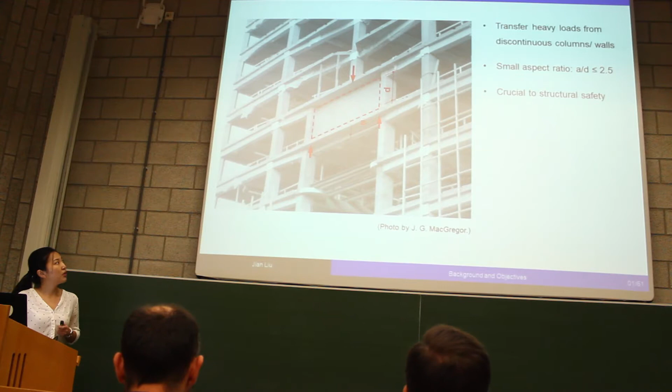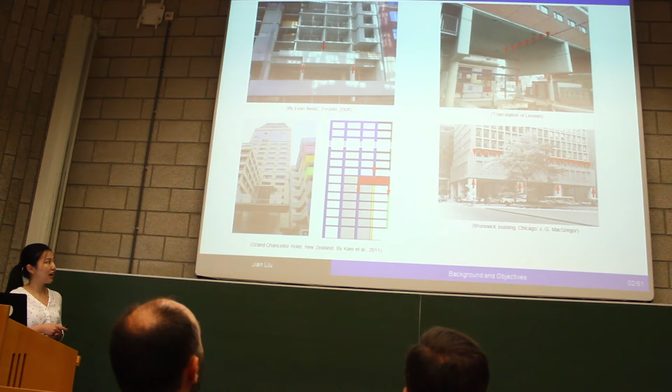But of course, there are some other cases. For example, here is a transfer girder in the train station of Leuven, and here is another building in Chicago, where instead of being concentrated, the load is uniformly distributed along the length. This is a structure in New Zealand, a cantilever deep transfer girder, which has the heavy load on the bottom stories.

In concrete structures, there are many other structural elements that are not called deep transfer girders, but behave in a very similar way. For example, we have cap beams in bridges, thick floor diaphragms in buildings, strip footings, and raft footings in foundations. All those structural elements could actually be adapted using the theory I'm going to develop to solve these problems as well.

As I mentioned, the A over D ratio is a very important parameter for deep beams. How will this parameter affect the loading mechanism of the beam?

Here I will demonstrate the reason through an experiment carried out by Kani. In his experiment, he tested a set of concrete beams with A over D from 7 down to 1, and all the beams tested failed in shear. If we follow the sectional model, based on the hypothesis that plane sections remain plane—a very classical hypothesis—our prediction is much lower than what we have seen in the experiment.

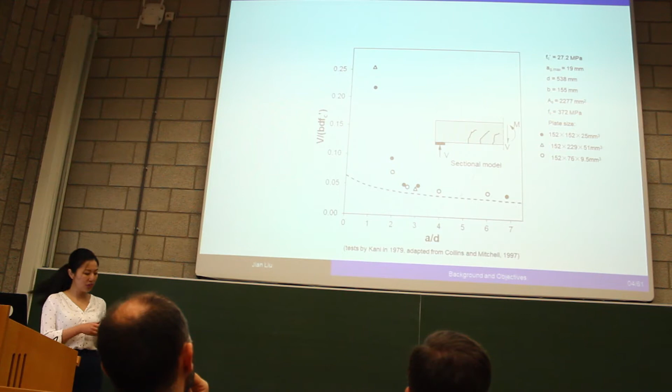Why is that? It's because in deep beams, instead of following the hypothesis that plane sections remain plane, we have a direct compression strut between the loading point and the support. This special loading mechanism makes deep beams much more efficient in resisting shear than slender beams.

And now I want to tell you more about the shear behavior of deep beams.

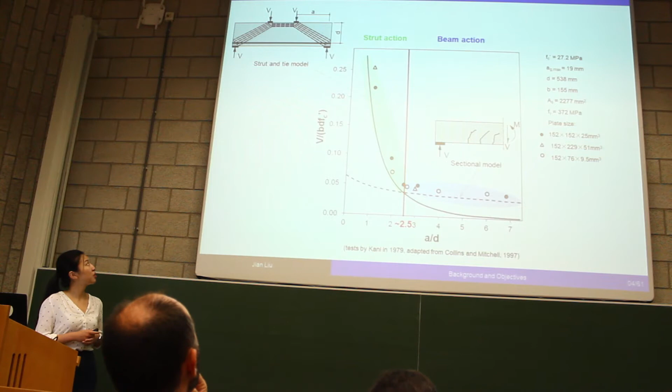I want to show you this experiment done at the University of Toronto. It is a deep transfer girder with a very large depth, 4 meters. At shear failure, we can see an almost straight diagonal crack, and at this small region we have concrete crushing.

Actually, before the test, there was a competition organized to predict the shear strength of this deep beam, and there were a lot of participants from all over the world. Here is our result. This vertical dashed line is the experimental result, and the other vertical lines are predictions based on design codes. Those dots represent individual predictions from either industry or university.

We can see very big deviation in all the categories, which means that even though in the past 60 years we have been making a lot of effort to study this problem, it's still a big challenge until nowadays to predict accurately the shear strength of deep transfer girders. But through this diversity, through this deviation, we can also see there are some models that behave relatively better than the others. But this is just a specific beam.

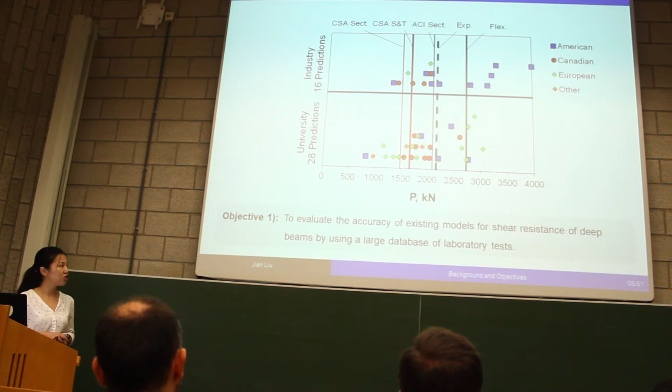Until now, I'm only talking about shear capacity, and as we can see from here, along the complete shear response, shear capacity just corresponds to a specific point. Of course this is the most important point, but through this point we cannot see enough about our structure.

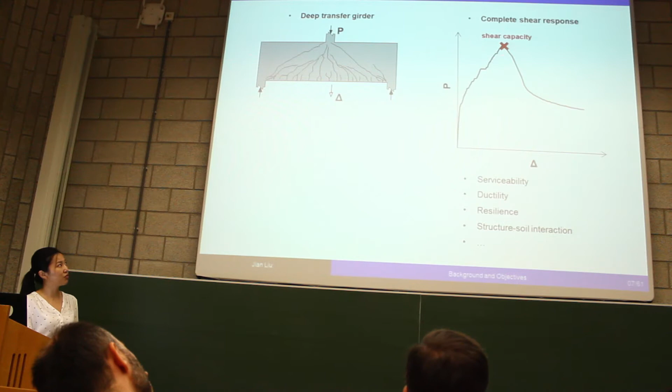For example, if we want to estimate serviceability at the service load, we need to look at the pre-peak behavior. If we want to estimate ductility, if our structure is under some accidental load, then we need to look at the post-peak behavior. Therefore, it's not enough to just focus on this single point.

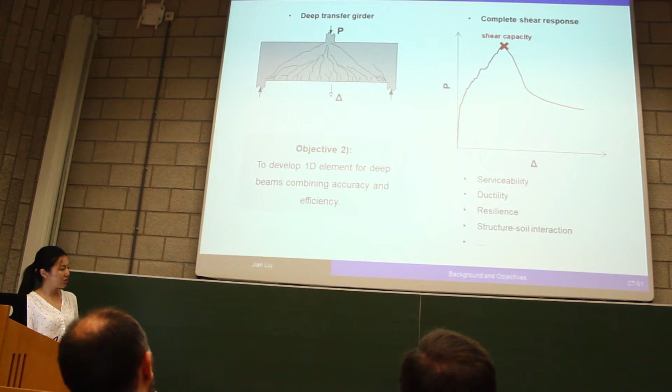Therefore, my second objective is to develop a 1D element for deep beams, combining accuracy and efficiency. For accuracy, I want my model to be able to provide this kind of complete shear response very accurately, and at the same time I want it to be efficient.

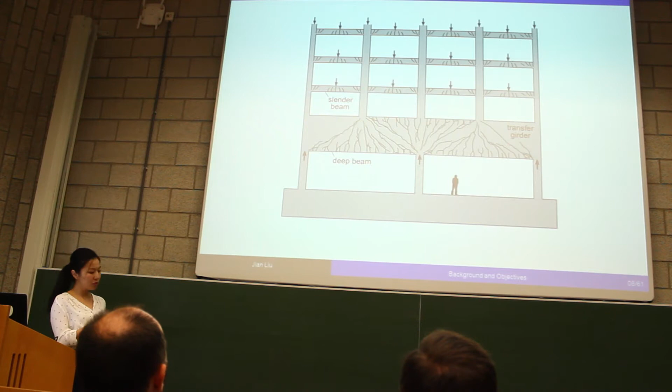But there's a fundamental problem: the theory background for deep transfer girders is wrong. It behaves totally different from a slender beam. Therefore, we can look at the other option: we can use 2D finite elements to model the entire frame. Now we can get more accurate results, but at the same time it is very time-consuming, or sometimes it's just impossible for us to build the model or run the analysis.

So this leads to my third objective. I want to use the 1D element I'm going to develop for deep beams together with the normal slender beams to form a 1D model for this entire structure. Therefore, my third objective is to integrate the new model into a framework of frame structures with both slender and deep elements.

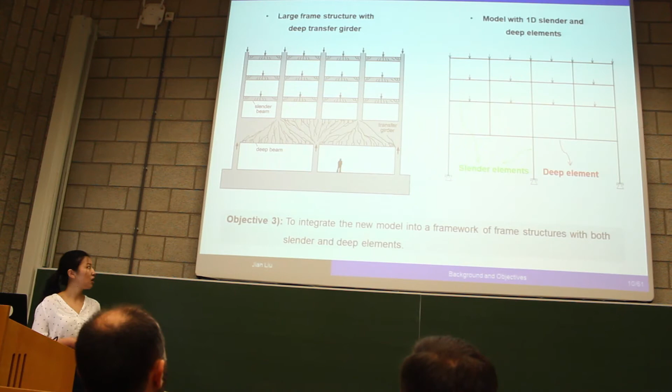So with these three objectives focused on solid deep beams, I have neglected a very important case, and this case is actually neglected by most researchers. We have such a large beam, normally this girder has a depth of 3 to 6 meters. With such a big volume of concrete, sometimes we just cannot avoid accommodating windows, doors, or pipelines.

Therefore, there must be some web openings installed in the transfer girder in a lot of cases. And if this web opening is interrupting the loading path, how will the transfer girder behave? So my last objective is to propose a model to predict the shear capacity of reinforced concrete deep girders with web openings.

In the following 45 minutes, I will try to achieve these four objectives one by one. My first objective is to carry out a comparative study on existing models, and then I can find out which

models are more adequate to predict the shear capacity of deep beams. To realize this objective, first I'm going to do a literature review, and I have looked at 73 papers published in the recent 30 years.

I have classified these 73 models into 6 categories. The majority of the research is focused on strut-and-tie models, and then I have a lot of artificial intelligence models and numerical models. And then I have 8% upper bound plasticity model, 5% shear panel models, and the smallest portion goes to other mechanical models.

I have to mention that in the following comparison, these two are not included. The reason is that numerical models are not developed especially for deep beams, and artificial intelligence models are based on mathematics rather than physics. Therefore, I only look at models belonging to these 4 categories based on physics.

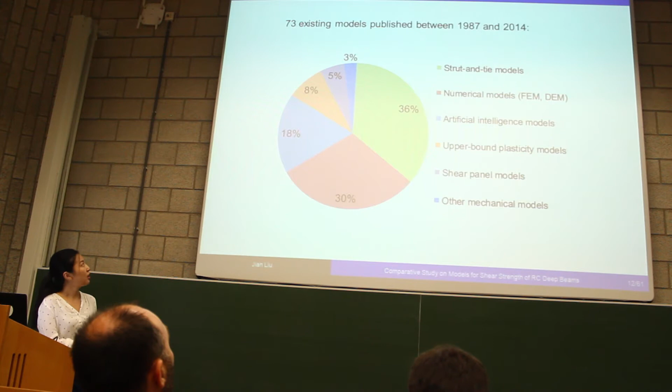In order to carry out this comparative study, I follow 3 steps. First, I collect a large database of tested deep beams, and then I implement 10 representative models into this large database. Finally, I could compare the predicted and experimental shear strength for each of these 10 models.

Here is a large database of 570 reinforced concrete deep beams. This database was collected by my supervisor, and I just did a little bit of extension. Here I show you the 10 models selected for the implementation. We have one shear panel model, one upper bound plasticity model, and we have 6 strut-and-tie models, and the last 2 go to mechanical models.

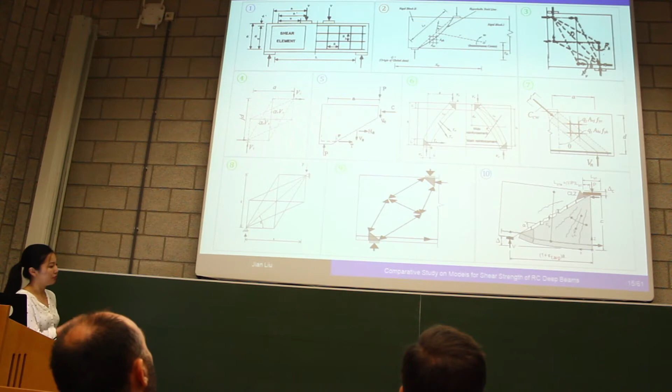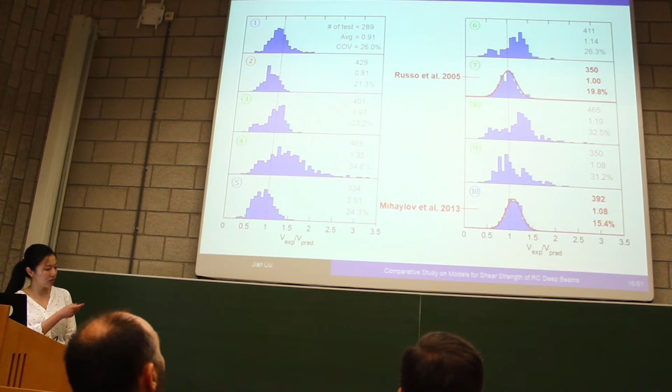Due to the good performance of these 2 models, it is interesting for us to have a closer look at them. So first, I look at the model by Professor Russo.

We have a strut and tie model. Here we have a concrete strut with compression in it. And due to the existence of web reinforcement, we have a statically indeterminate shear system. The shear strength of this shear span is assumed to be contributed by concrete and web reinforcement.

The full expression is like this. There are a lot of coefficients in this equation, and most of them are actually derived by fitting with more than 200 experiments rather than physics.

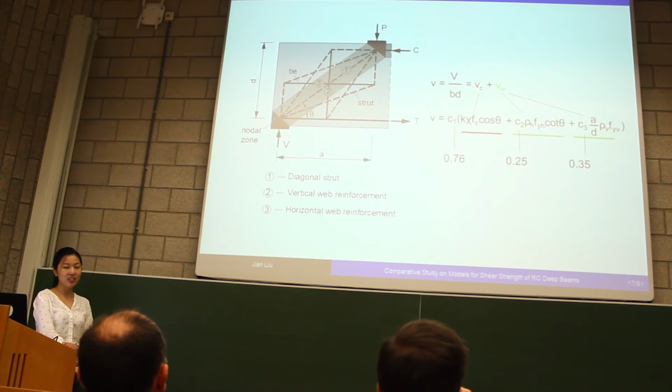The other model is called the 2-parameter kinematic theory, which is developed by Professor Mihaylov in 2013, based on experimental observation. Here, in this model, we assume there is a diagonal crack running from the support up to the loading plate, and this straight crack separates the shear span into 2 parts. We have the bottom part behaving like a fan.

It opens according to this point, along with the elongation of the bottom reinforcement, which can be represented by the tensile strain epsilon T average. At the same time, we have this top part, which is assumed to be rigid, except that we have this

small region, which is called the critical loading zone. Inside, there's a very high concentration of compression. Therefore, we have vertical displacement delta C in this region, and with this delta C, these two blocks separate from each other vertically. With these two parameters, we can actually express the entire displacement field of this shear span, which turns out to be a very important tool. I will talk more about it later.

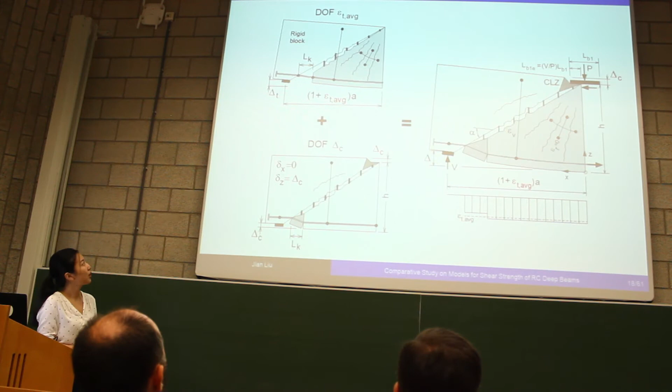Now we can look at the shear mechanism. Along the diagonal crack, we have four shear mechanisms. We have the shear contribution from the critical loading zone due to the high compression. We have shear contribution from aggregate interlock due to the opening and slip of cracks. Then we have the contribution from stirrups, and we have the dowel action in the longitudinal reinforcement.

If we look at the vertical equilibrium of this free body, we have the shear force equal to the sum of these four shear mechanisms. And if we look at the moment equilibrium, we can easily relate the shear force to the tensile force in the bottom rebar. How do we solve this system?

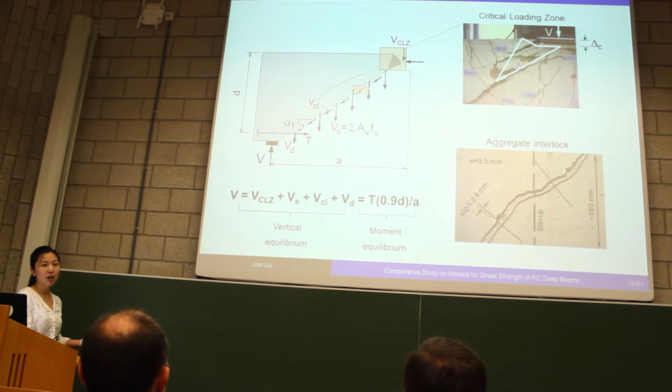So by now, we already know enough about these two models. We can go back to the comparison. We already know that these two models behave very well statistically, but are they physically reasonable? To answer this question, I did a parametric study. I looked at some important parameters, for example, A/D ratio, the stirrup ratio, the longitudinal reinforcement ratio, and for all those parameters, the two models capture very well the trend in experiment.

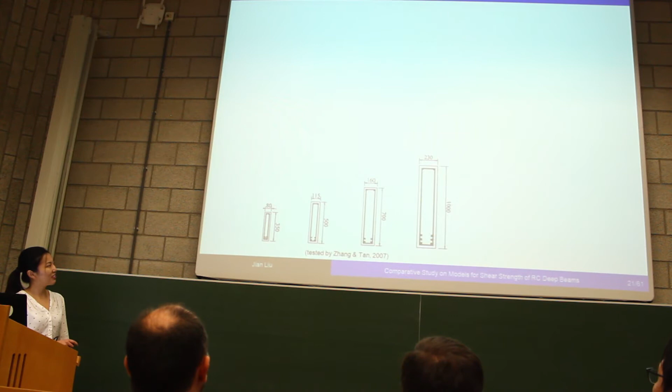But there's one very important effect I want to talk about explicitly. It's called size effect, and I will demonstrate this effect with the help of an experiment done by Zhang and Tan in 2007. In his experiment, all the beams are symmetrical, very similar in terms of geometry. The main difference is the dimension of the beam.

Here is the result. On the horizontal axis, we have the effective depth. On the vertical axis, we have the nominal shear strength. We can see when the beam depth increases from 350 millimeters to 1 meter, there's a clear decreasing trend in both beams without stirrups and with stirrups. The shear strength decreases around 15% for both groups of beams.

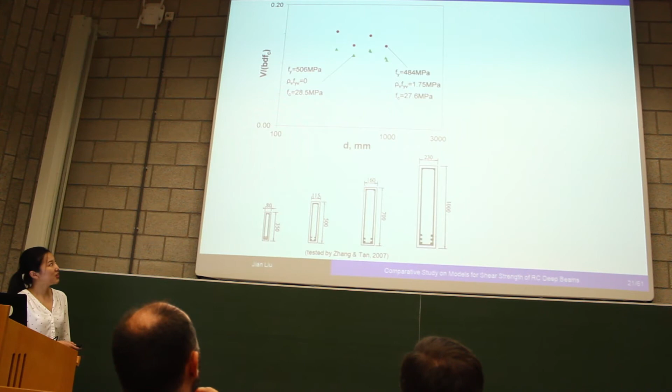It seems not a very big difference, not a very amazing difference, but the problem is that in practice we have very large structures. For example, here I show you, it's around 3 to 6 meters. So if we follow this trend, the shear capacity can reduce by 30 to 40%. This is huge. We must take this effect into account in our model.

So how are these two models behaving in terms of size effect? Here is the result. Obviously, the strut-and-tie model totally neglects this effect, and the effect is very well followed by the 2PKT model. Therefore, my conclusion for this comparative study is that 2PKT provides adequate predictions. Among the 73 models I have reviewed, most of them, almost all of them, are only focused on shear capacity. Only 2PKT is not only focused on shear capacity, but it can also predict the deformation.

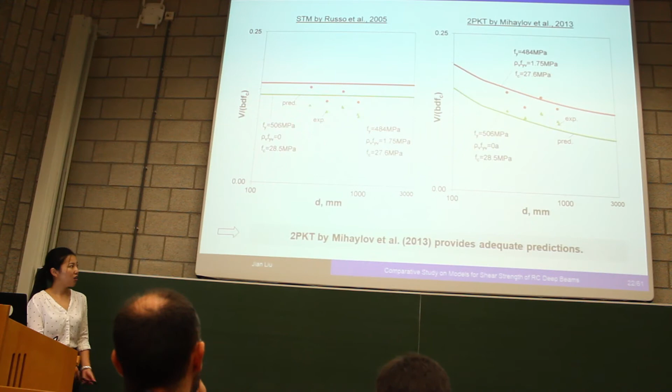2PKT can still produce very simple expressions for crack width and crack slip.

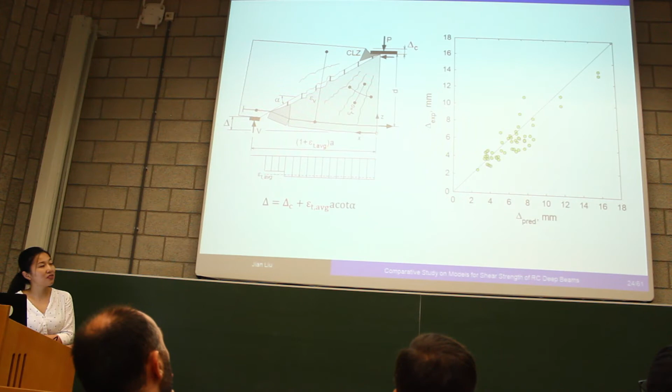Not only deflection, but even the entire deformed shape for beams with different slenderness at different load levels, 2PKT can still provide relatively good predictions. So we know 2PKT is a very powerful tool, not only for shear capacity, but also for deformation capacity.

But there's a limit to this theory: it can only be applied to simply supported deep beams. In practice, large deep transfer girders are often continuously supported. At this moment, even though 2PKT is so powerful, we cannot use it. So there's a need to extend this theory.

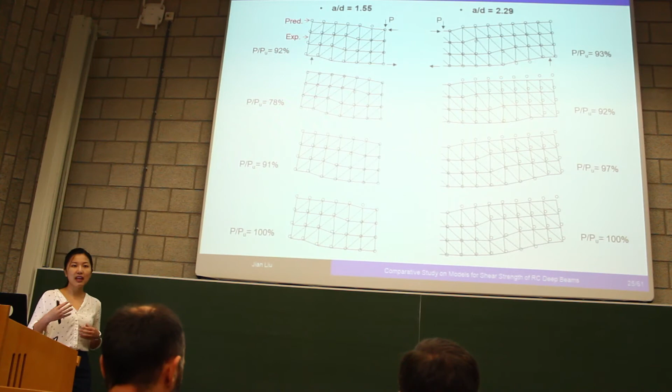Therefore, I will use 2PKT and 3PKT as the theoretical background to develop all the study I'm going to show you later. With this theory, I can start my second task, which is to formulate a macro element for the complete shear behavior of deep beams.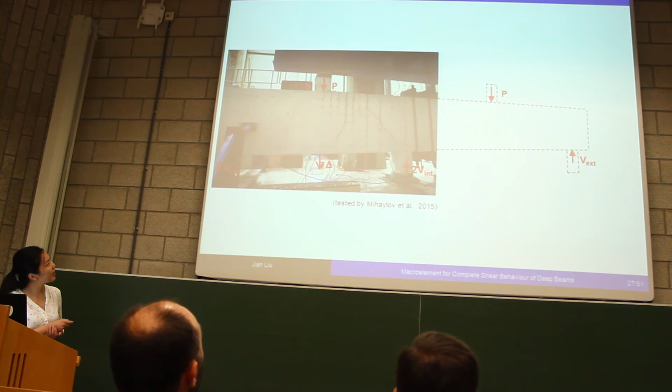Instead of jumping directly to the formulation with equations, I prefer to show you how the continuous beam failed in the lab. This is a two-span symmetrical continuous deep beam, with a symmetrical axis, three supports, and two concentrated loads, and shear failure happens in this shear span.

At shear failure we have a diagonal crack and also a small region of concrete crushing. This is very similar to what we observed in simply supported deep beams. The main difference is that now the cracks are spread within the entire shear span at both sides of the diagonal crack, very similar to what I showed you in the 3PKT assumption.

To the right hand side, I show you the complete shear response of this beam. For the macro element I'm going to develop, my target is to produce this kind of complete response prediction, including both pre-peak and post-peak behavior.

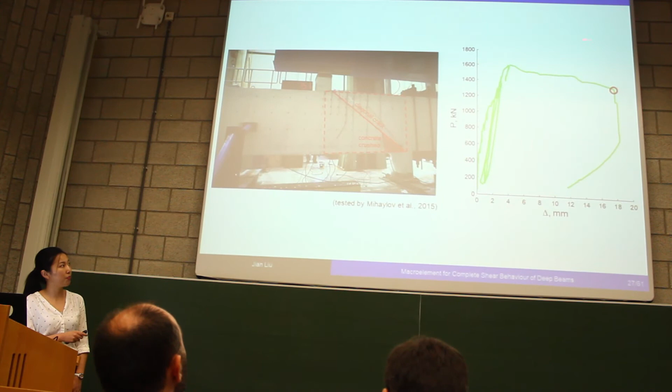So in order to develop this macro element, I look again at my theory background, 3PKT, from another perspective. Before, I expressed the opening of this fan with the elongation of the rebars. Is it possible to express the opening just with the opening angle theta? Nothing changes, just the way of expression. Now, instead of having epsilon T1, epsilon T2, and delta C, I use theta 1, theta 2, and delta C to express the behavior of this shear span under double curvature.

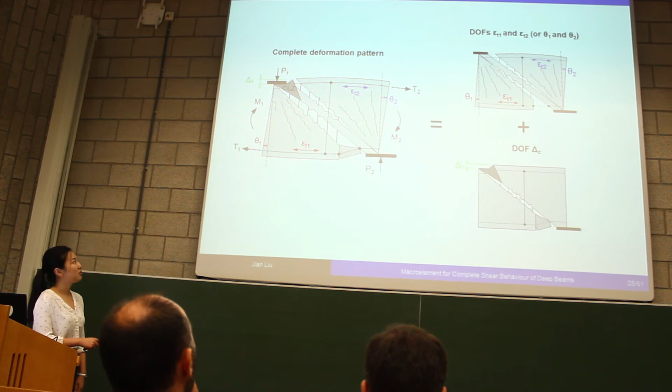Why do this? Because it makes the formulation of the macro element easier. In this way, I can represent these two fans with two rotational springs at the two ends of this macro element, where the rotation inside each rotational spring equals this angle.

To maintain equilibrium, I will need a transverse spring. The elongation in this transverse spring represents the vertical separation between the two parts, which is delta C. Therefore, the equilibrium of this shear span can be rewritten with the help of the secant stiffness of each spring, and once we know the secant stiffness under given boundary conditions, we can solve this shear span without problem.

Now I want to talk about the constitutive relationships of those springs. First, I look at the rotational springs, the two springs at the ends.

Before any cracks appear in my beam, I assume the beam behaves elastically following Mohr's theory until the first flexural crack appears in my end section. Then I use a parabolic transition curve to model the propagation of those cracks. Finally, I get this critical diagonal crack when the tensile force in the longitudinal reinforcement reaches two times NCR, where NCR is the cracking force of the zone influenced by the bottom reinforcement. After that, I can adopt 3PKT to describe the behavior of my beam.

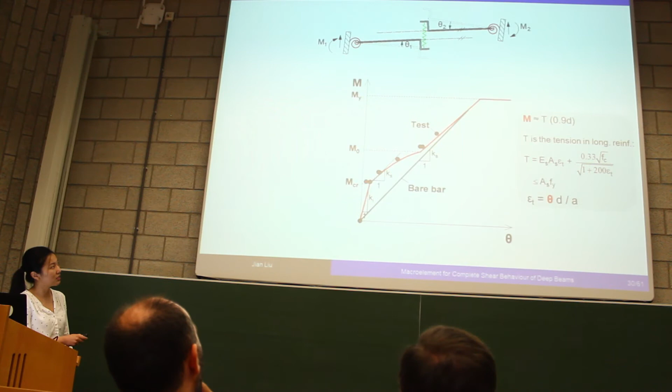The proposed relationship seems quite reasonable because it compares well with the experimental result, as you can see here. In this relationship, we also include the unloading path.

Before the formation of the diagonal crack, we assume there's no plastic deformation happening. Afterwards, we assume that it is parallel to the bare bar. This is very important, the post-peak unloading path, because it's important for the post-peak behavior, and also for the load redistribution in continuous beams, which you will see later.

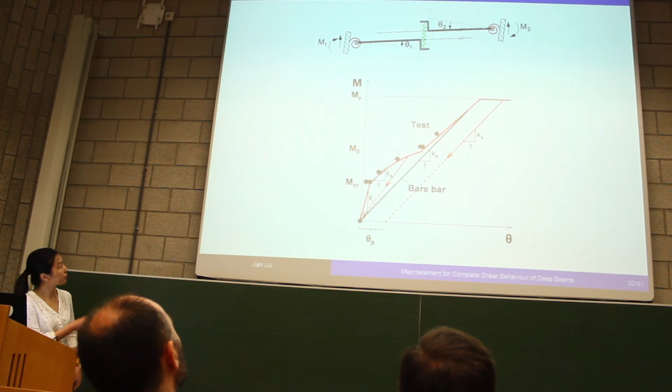Now we go to the transverse spring. Even though in the macro element there's only one transverse spring, it actually represents 4 springs in parallel, and each spring represents one shear mechanism along the diagonal crack. There are shear contributions from the critical loading zone, from aggregate interlock, from stirrups, and from dowel action.

I will just look at one of them, for example the critical loading zone. As I told you, in the critical loading zone there's a very high concentration of compression. Therefore, the behavior of the critical loading zone is very similar to concrete under compression.

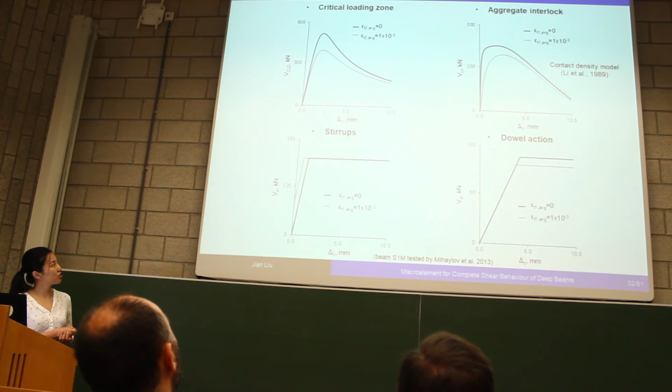Once we have the relationship for all 4 springs, we can have the constitutive relationship for this single transverse spring. We assume that before the formation of the diagonal crack, the shear behavior is elastic, following Timoshenko theory, and then we have a sudden increase of deformation due to the unstable propagation of cracks. Then we can follow 3PKT again. Here I also include the unloading path.

So once we know well the secant stiffness, it's easy for us to form a stiffness matrix for one macro element. And if we assemble several macro elements together, we have the structure of a simply supported or continuously supported deep beam. Under a given loading condition, we can calculate the matrix of nodal displacements.

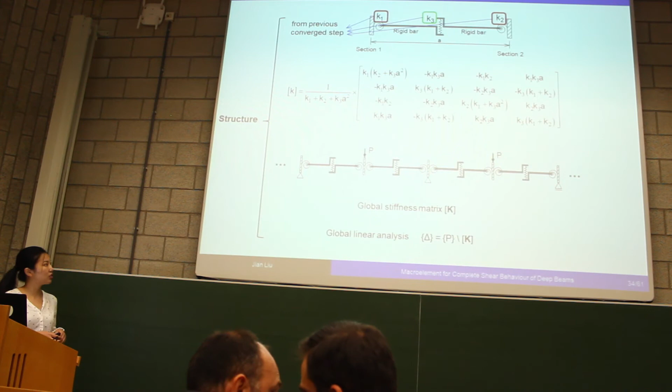From this matrix, I can read the displacement at each end of the macro element. With the help of this matrix, called the transformation matrix, I can calculate the three important degrees of freedom within my macro element based on the constitutive relationships I have just introduced.

For the three springs, I can calculate the internal forces in my macro element, and therefore update the secant stiffness. This procedure needs to be repeated many times until convergence is reached for the secant stiffness.

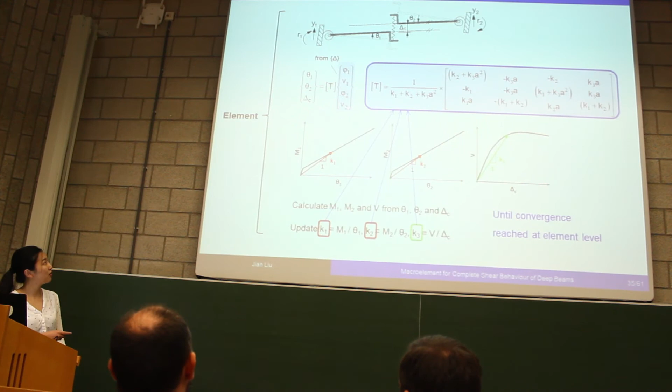And then I bring this secant stiffness back to the element level. I repeat the entire procedure many times until convergence is reached at both levels, I mean structure level and element level.

I have applied this procedure to these simply supported deep beams. I model it with two macro elements. As we can see, even though the two spans are actually identical, the shear failure is concentrated only in the right shear span. What is the reason? We can explain this with the help of the macro element.

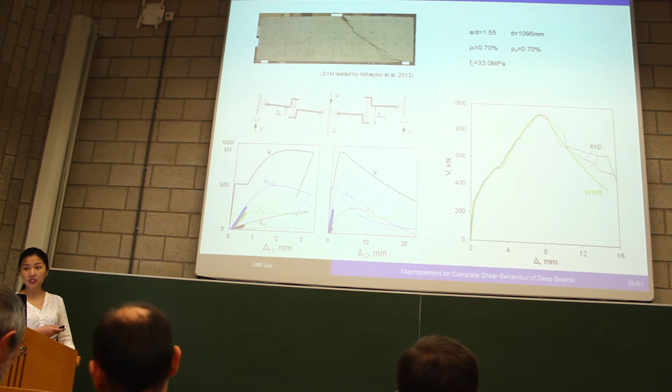Actually, this shear span goes into post-peak, and this one goes into unloading. Therefore, this shear span... and here is the global shear behavior. Again, we can see that in terms of both the pre-peak and post-peak regions, our prediction matches very well with the experimental results. And I have applied this procedure in the same way to many other beams.

Here are the results.

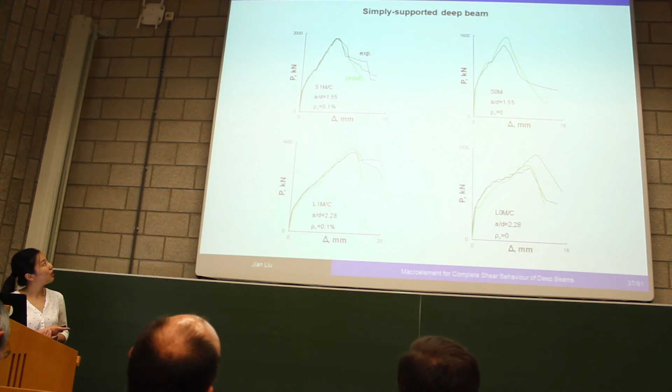Here I show you a more complicated case, which is a continuous deep beam. It is a symmetrical beam with two spans. Here is the shear response, and it is very interesting to see that it is ductile, which is very different from what we know about shear.

What's happening is that we have a redistribution of load between this shear span and that shear span. This very beneficial action is very well captured by our macro element, so we are very happy about this.

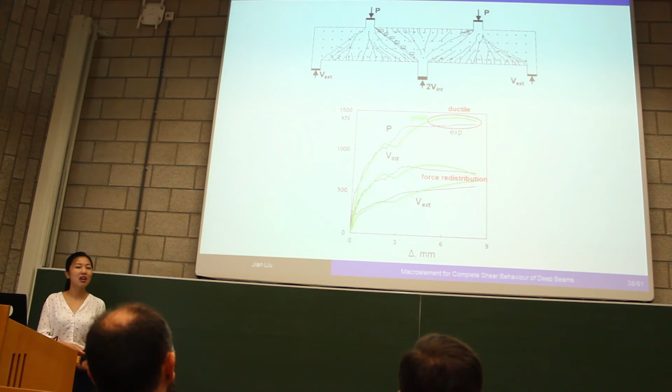For shear response, it's not only this load-displacement relationship; of course there are many different aspects. For example, we can also look at the crack width in the diagonal crack here, and our macro element could provide a prediction for crack width at different load levels.

This can be a very important and useful tool, especially for existing structures, because we can measure the crack width inside, and then with this plot we can estimate the current load level and compare it with the load capacity to really know if our structure is safe or not.

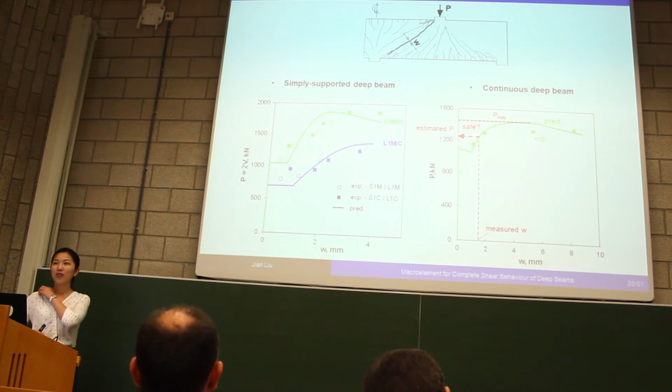So until now, I've only been talking about beams, simply supported and continuously supported. But as you know, my target is a large structure - a large frame structure.

Therefore, I need to continue to move on, and I need to formulate mixed type modeling of structures with slender and deep beam elements, based on the macro element I have just developed.

Again, we see this large frame structure, and now what I'm going to do is integrate these deep elements into a framework which has slender elements and is suitable for frame structure analysis.

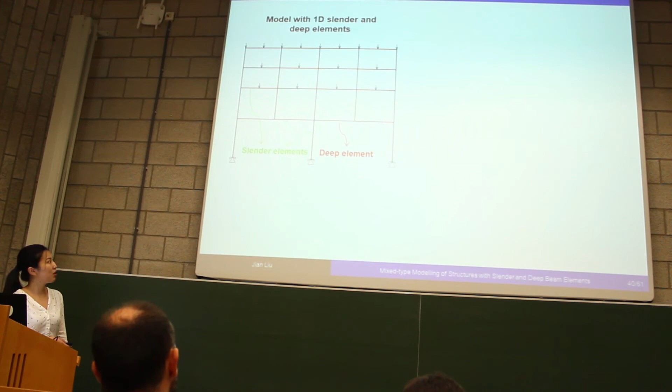There are many options, many finite element softwares I could use. Finally, we chose a program called VecTor5, developed at the University of Toronto, which has been shown many times in literature for good prediction of shear critical frame structures.

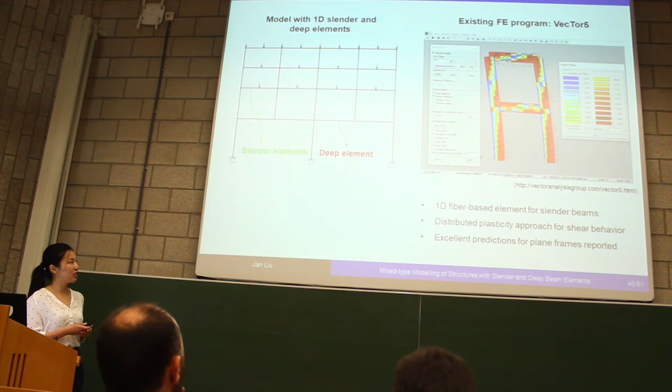How does this program work? It's very similar to the solution procedure I showed you in the previous chapter. It includes two levels of analysis: a structure level, global frame analysis based on classical stiffness-based finite element formulation, and an element level nonlinear sectional analysis based on fiber section approach.

So basically, at the structure level, I calculate the member deformation, and this member deformation is then imposed on each single element. Between these two levels of calculation, we produce unbalanced force, and this iteration continues until these unbalanced forces are close enough to zero.

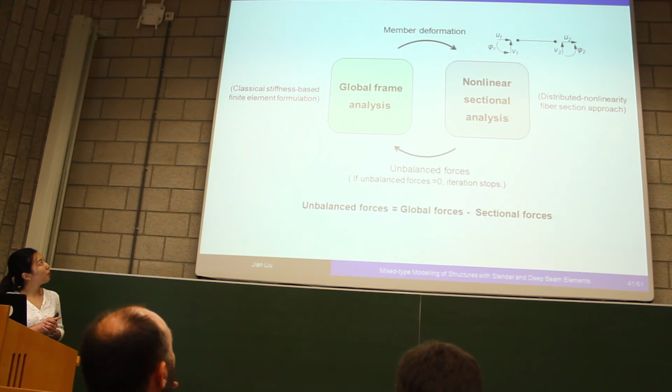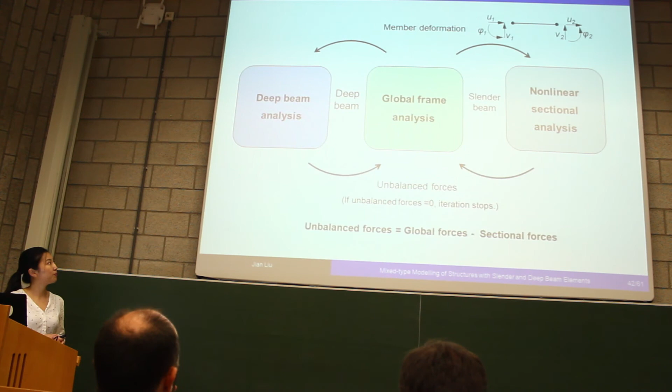For my mixed type modeling, I didn't touch anything in the original VecTor5. I only included one more subroutine in the Fortran code for my deep beam analysis. As you can see here, again based on unbalanced force, I reach my convergence. With this procedure, I model this simply supported deep beam.

Different from before, now I have 4-point bending, so this part is actually under pure bending. Therefore, to model this structure, I need a deep element for this shear span, and I need a slender element for this little part under pure bending.

Before looking at the results, I want to look at the convergence. There are different options in VecTor5 for convergence factors. Here I just show you the default one, which is based on the unbalanced force. At each single load step, the convergence factor is close enough to 1.

Here I also show you the iteration number. In each load step, it is much smaller than the maximum iteration number.

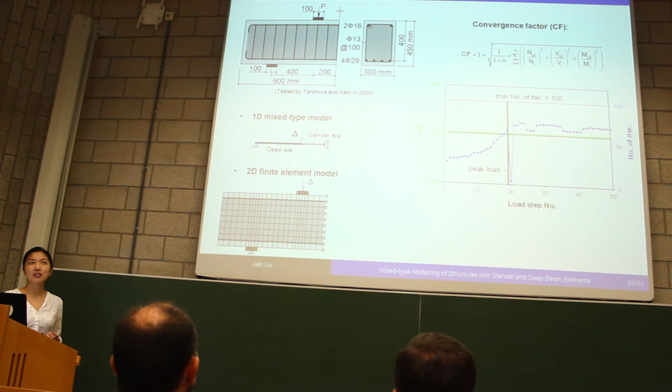Then, for the sake of comparison, I also built a 2D finite element model for each of the structures I'm going to study. This 2D model is based on a program called VecTor2, also developed at the University of Toronto, based on modified compression field theory.

Let's take one step further, because I want to study the large frame structure. Here I have designed a frame structure based on ACI code. It's very difficult to test in the lab, so there's no experiment done for this.

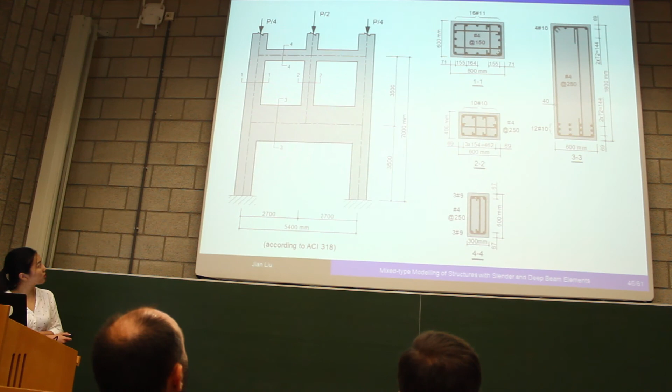To model this structure, I want to say more about this frame. I have slender beams, and I have two deep transfer girders, deep shear spans here, and there are 20 stories, but I don't show them all here.

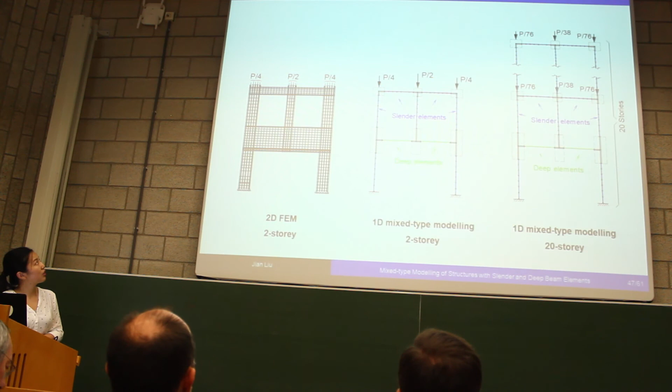I model this frame structure with 3 different modeling strategies, because as we know, most of the load will be transferred in this deep shear span, so it is very logical and practical if we neglect the upper part of the structure.

Therefore, the first two models use a simplified model, which only includes the bottom two stories, and the third one builds the entire 20 stories. Obviously, to build these three models, I need a different effort. But will the results also be different?

Here is the answer. I show you the load displacement relationship. The displacement is the deflection in the first floor, and the load is the total load imposed on the structure. The blue represents the result from the simplified two-story frame, and the green represents the 20-story. As we can see, for the two-story simplified model, the 1D mixed type modeling result matches well with 2D finite element analysis for the peak load and the stiffness.

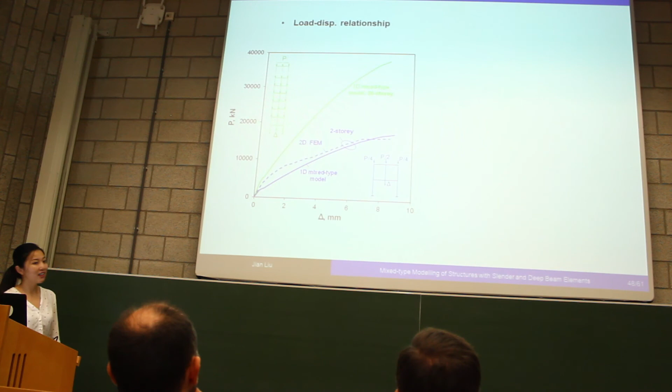But even though it's very small, we have many stories, so if we accumulate these small loads together, it's still a very big portion of the total load. Therefore, it is very conservative if we have a multi-story frame and we neglect the contribution of the upper stories.

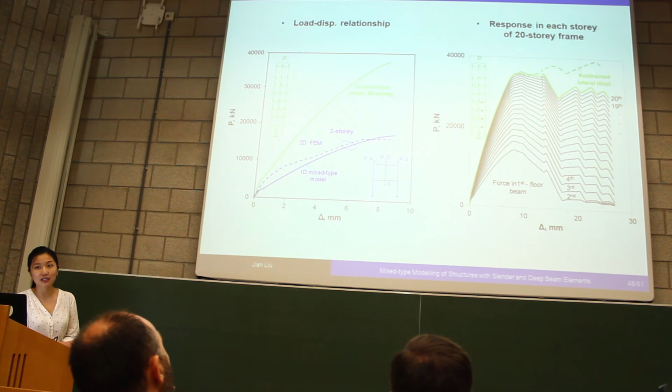To conclude, this mixed type modeling can capture well the load redistribution and the interaction between members in large structures, and at the same time it is very efficient.

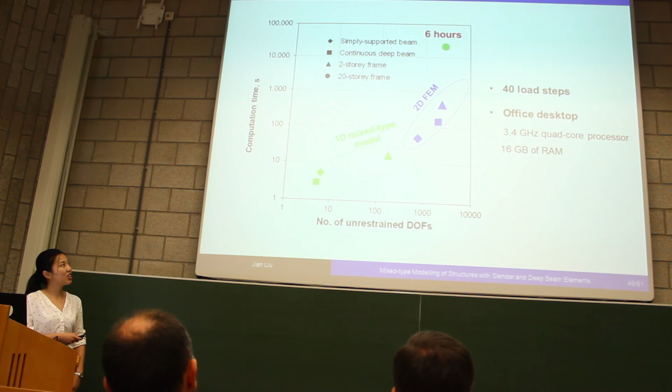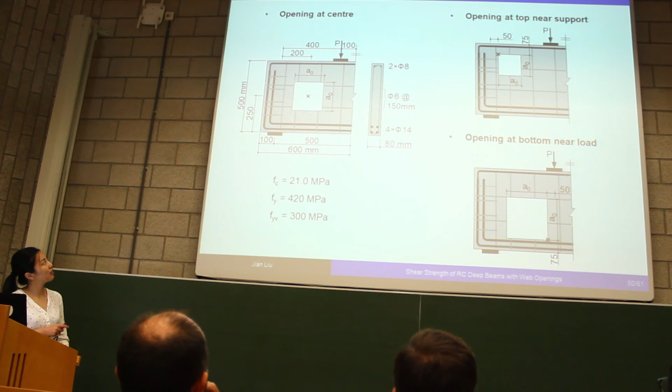This is a special case. Here I show you the experiment done by El-Maaddawy and Sherif in 2009. In their experiment, they have a square opening in the shear span; they changed the location of the opening and changed the size of the opening. According to their observation, there are two different failure modes, mainly depending on the size of the opening.

When the opening is small, we have two critical shear cracks above and below the web opening, and at the same time some other cracks propagating either from or towards the corners of the opening. When the opening is large enough, we also have a horizontal crack.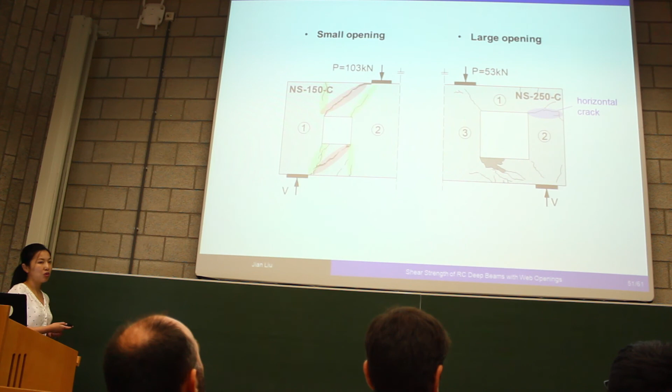In order to understand more about the behavior of those specimens, I also modeled them with VecTor2, and I managed to get a very similar crack pattern as observed in the experiment. I also looked at the stress distribution; here it is the principal compressive stress distribution.

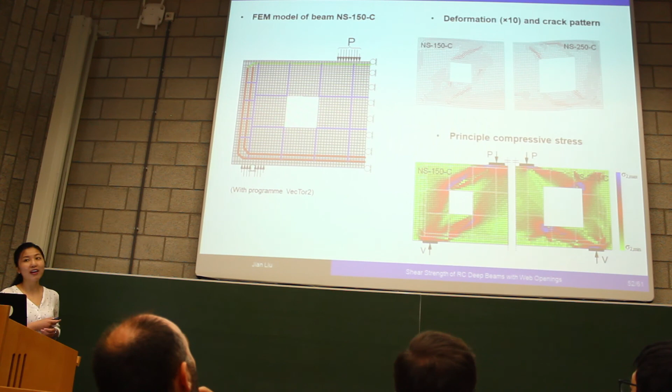I found it very interesting that if I only look at this small area, both the crack pattern and the stress distribution are very similar to the case of solid deep beams. So I was thinking we could probably use some models for solid deep beams to model this small region.

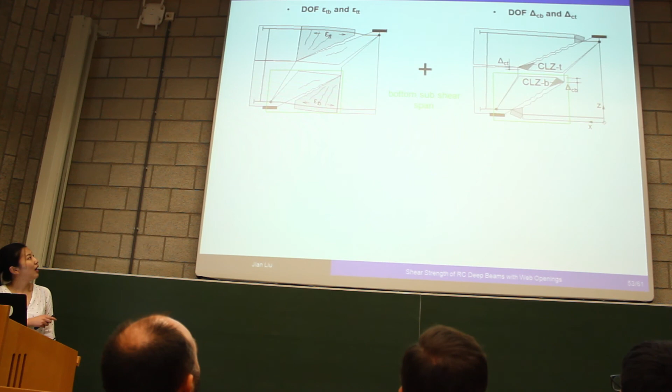Therefore, we have this kinematic model, and in this green square we have this small area, which I now call the bottom sub-shear span, and I try to associate it with 2PKT.

I will express the distribution of the deformation pattern with two parameters, epsilon FB and delta CB, exactly as in 2PKT for solid deep beams. If I reverse this deep beam, I will have the same case as in the top sub-shear span.

But still they are different. I will show you some differences between them. If I separate the two rigid blocks according to this diagonal crack, in the top L-shaped region I have the top sub-shear span, and here at the support I have a combination of shear force and compressive axial force.

This is different because in normal solid deep beams I don't have this compressive axial force, only the shear force. To maintain global equilibrium, I must have the same force as NT but in the opposite direction. Therefore, in the bottom region I have a tensile force, with the same value as the compressive force here.

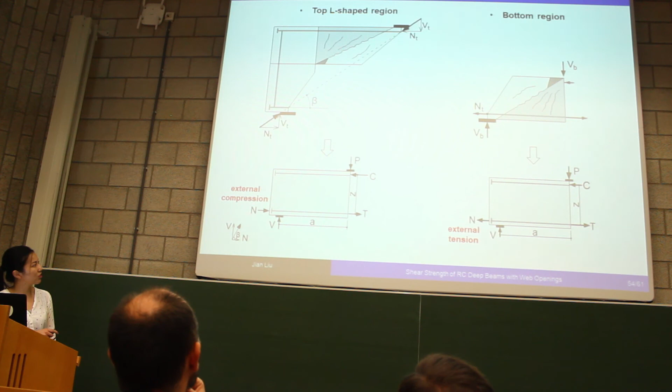So here I show them in a simplified way. We have external compression here and external tension here. Remember the solution procedure for normal solid deep beams: we have the intersection between this red line and the black line.

But now if we have additional compression, this solution will move upwards. With tension, it will move downwards. Therefore, based on this solution procedure, we can calculate the shear strength of the two sub-shear spans.

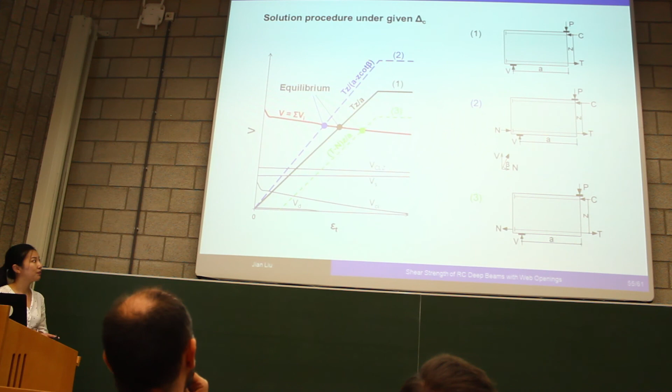Also, we need to look at this horizontal crack. I name this horizontal crack as crack A, and all the shear force going through the top shear span will pass this section. Therefore, the capacity of this section is limiting the shear capacity of the top sub-shear span. In this section we have both bending moment and axial force.

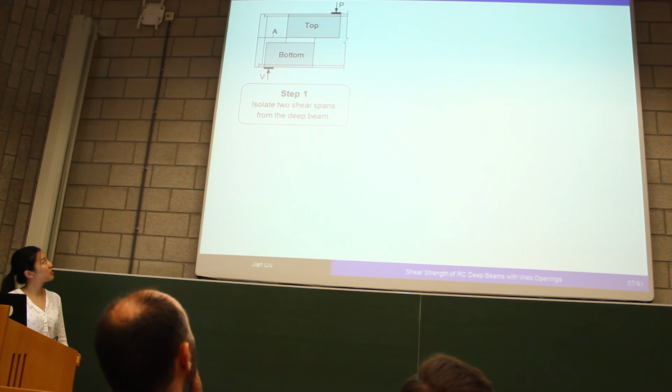To follow the classical way for slender beams, we can solve the capacity of this section. So to summarize, we have five steps to solve this problem. First, I need to isolate the two shear spans from the deep beam, top and bottom, and then solve the shear strength of the top sub-shear span based on 2PKT with additional compression.

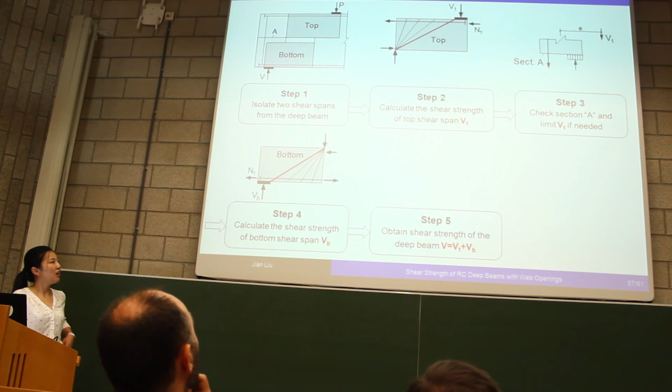Then I calculate the strength of section A. Then I calculate the shear strength of the bottom sub-shear span based on 2PKT with additional tension. Finally, I just sum them up in a very simple way.

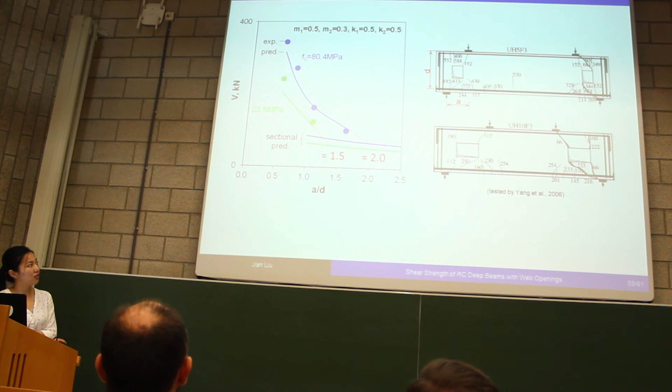Another parameter I looked at is the a/d ratio of the global shear span. Again, we can see that the shear capacity drops quickly when the beam becomes more slender. We have also plotted the prediction based on the sectional model for slender beams, and the intersection between the prediction for deep beams and slender beams corresponds to the transition zone of deep and slender beams. Normally for solid deep beams, this value corresponds to around 2.5, but with the existence of web reinforcement, this a/d ratio is smaller—around 2 or 1.5, depending on the case.

Finally, I have implemented this procedure on all 27 deep beams I could find in the literature. In terms of shear strength experimental-to-predicted ratio, I have a mean value equal to 1.03 and coefficient of variation equal to 9.3%. So that's all my research work in my entire PhD.

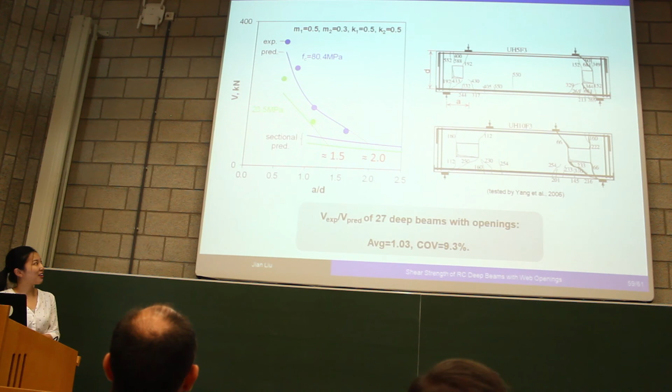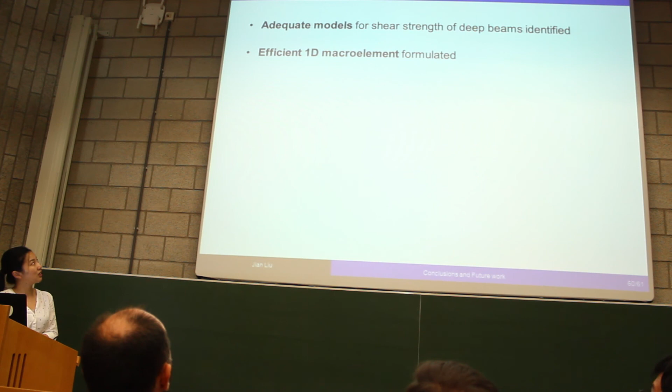So I would like to conclude before the end. First, I have identified adequate models for shear strength of deep beams. I have formulated an efficient 1D macro element and implemented it into different deep beams, and I have predicted the complete shear response well.

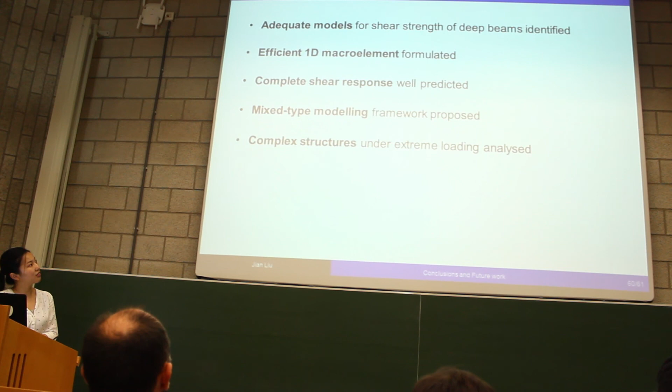And I have established a mixed-type modeling procedure, which I use to study the behavior of complex structures under extreme loading. Finally, I looked at a special case, which is deep beams with openings, and I propose a solution for it.